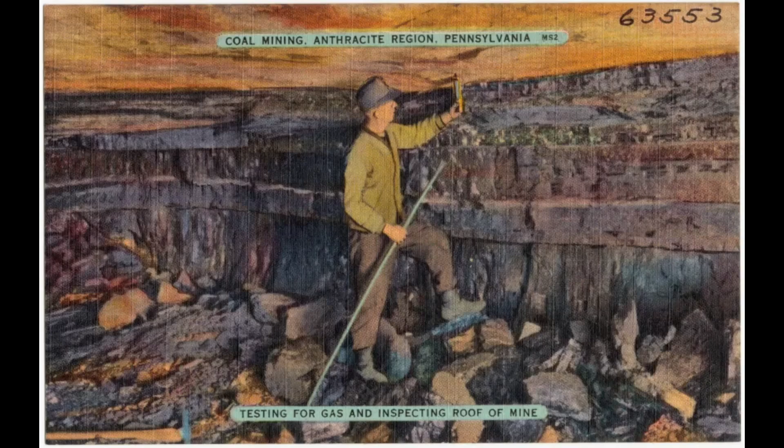It is no secret that the decline of the coal region left many skilled tradesmen without a job. In addition, a lot of workers in the industries that supported the coal industry were wondering what they would do now that coal was declining.

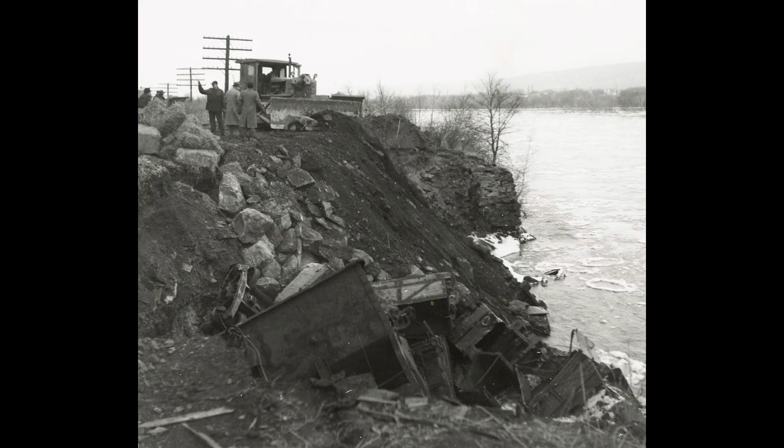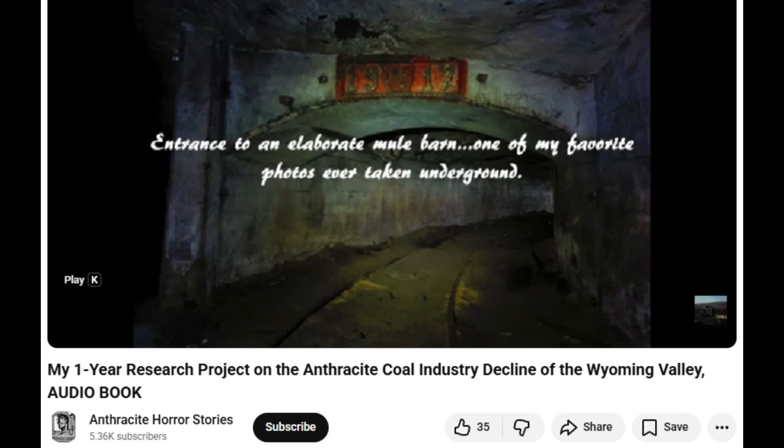The Knox disaster really put one of the last major nails in the coffin for the coal industry in northeast Pennsylvania. Jude O'Donnell over at Anthracite Horror Stories did a great essay on the decline in the 50s and 60s, which is worth checking out, and it interestingly corresponds with some of the trends I've seen in the drilling industry that supported coal.

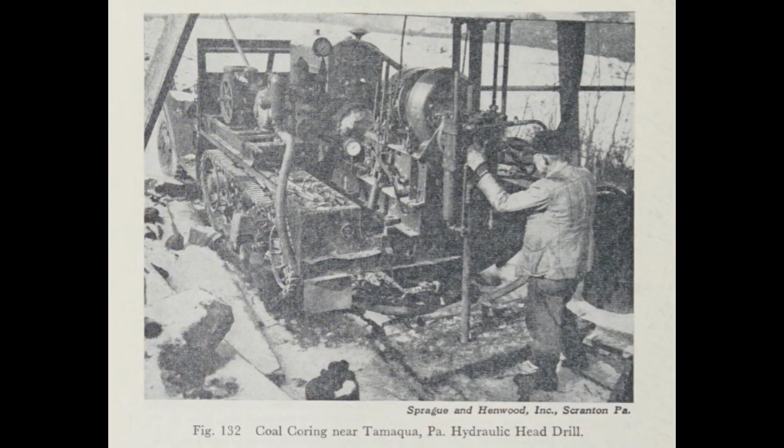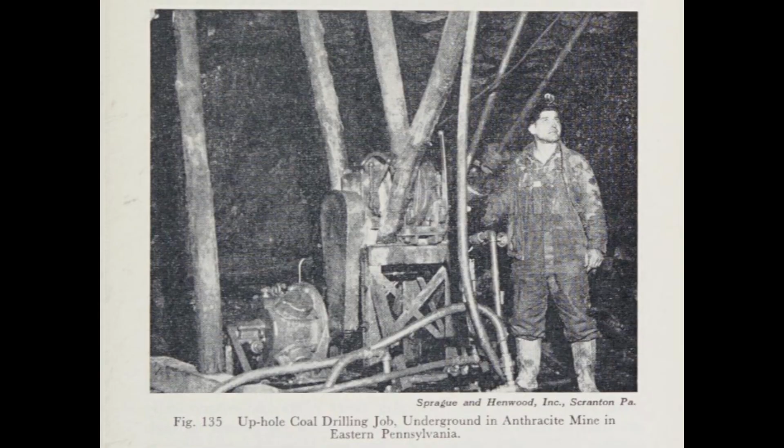Drilling was used for exploration, and in previous videos I touched a little on the geotechnical side of things. Many drilling contractors and firms in eastern Pennsylvania, when coal started to decline, transitioned more into the geotechnical field, particularly for foundation samples.

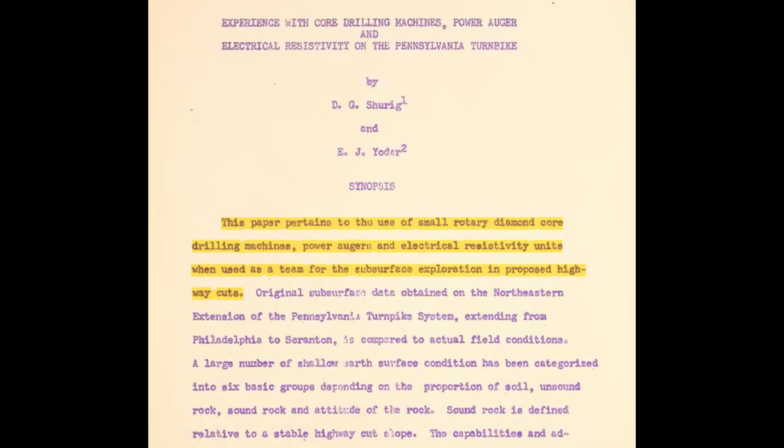I came across this technical paper online covering the geotechnical investigation for the northeast extension of the Pennsylvania Turnpike. If you're local to eastern Pennsylvania, no doubt you've driven along this at some point. This paper covers primarily the use of core drills, auger drilling, and electrical resistivity testing, and how reliable and accurate the information recovered from those three methods was.

The information was gathered over about a year between 1954 and 1955, placing it in the time period of major highway construction in the United States and the decline of the coal industry, since it was only a couple of years later that the Knox mine disaster happened.

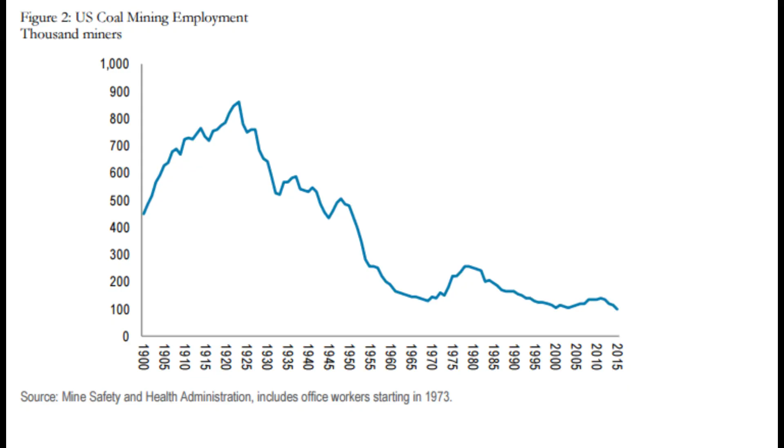As we could see from the graph before showing the employment of coal mine workers in the United States, there had been a steady decline since the 1920s.

It had been known since the 1920s that you could use a small diamond drill to take samples of soil and use that information to estimate the bearing capacity of the soil.

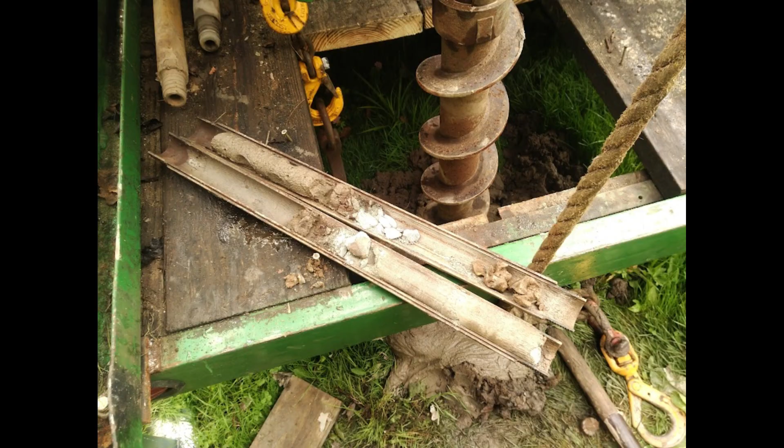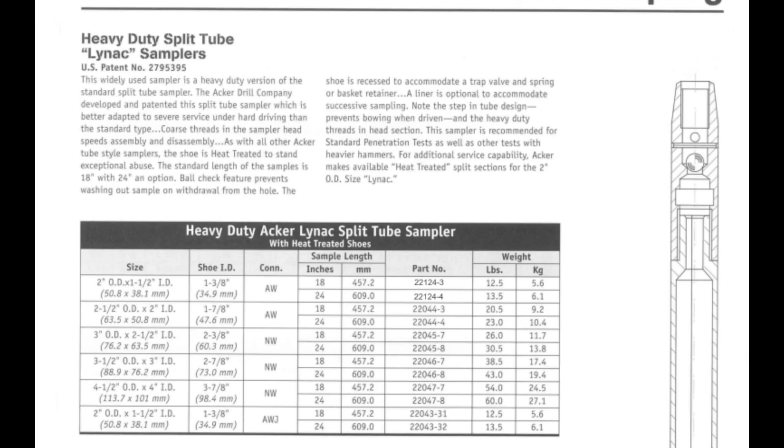For the last century, the split spoon sampler has been the backbone of soil investigations. It was originally invented by Sprague and Henwood out of Scranton, and later Acker Drill made design changes to further improve it.

The report specifies that 2-inch split spoons were used for soil sampling, while single tube core barrels were used for rock coring.

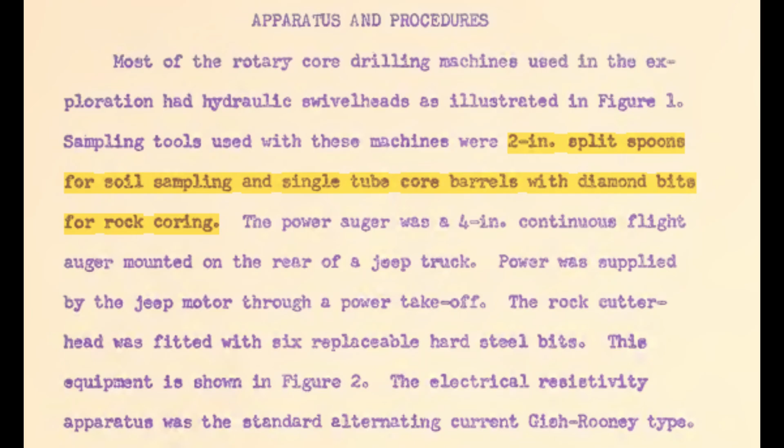In my core barrel videos, I cover single tube core barrels, but with a split spoon sampler they call it a standard penetration test. You have a 140-pound weight dropped 30 inches onto your 2-inch sampler, and you count how many blows for every half a foot of penetration. That correlates roughly to the density and bearing capacity of the soil.

If the other methods indicated rock potentially above grade during the design phase, core drills would be brought in to core that rock. To get down to rock, they'd have to drive a 4-inch casing with a 300-pound hammer, and this used to actually be a standard.

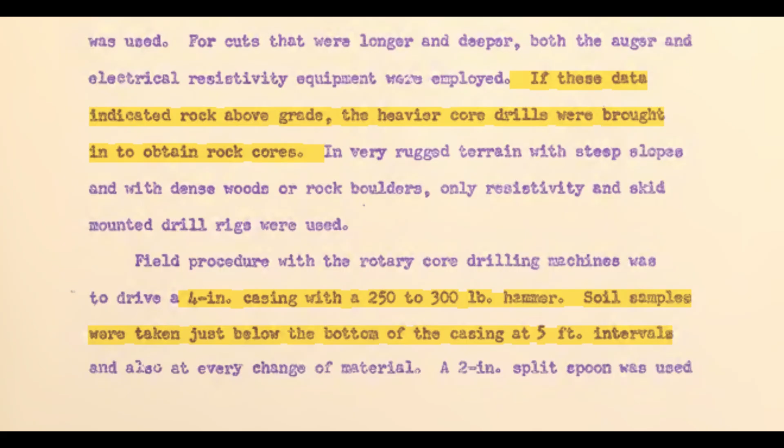It would be 4-inch outside diameter casing, 300-pound hammer, 24-inch drop, and you'd count how many blows for each foot of penetration. Very similar to the split spoon sampling method, but now the casing blow count is an outdated practice.

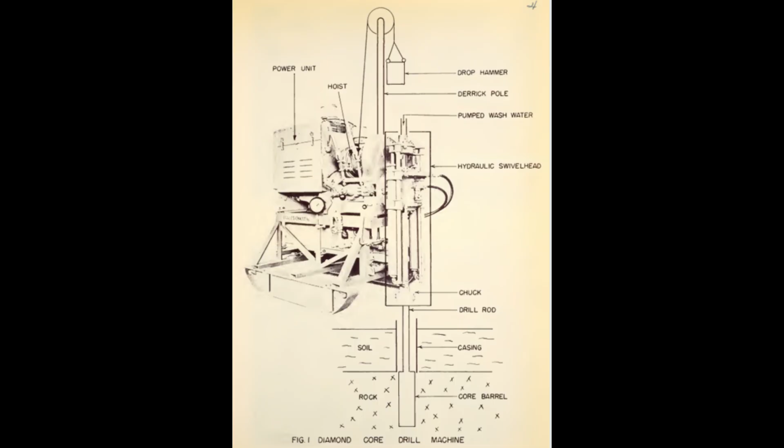The previous page also indicates that split spoons were taken every 5 feet or at the change of material, which is still a fairly similar practice to modern day.

Here there is a schematic they provided, or diagram, of the diamond core drill used in this method. You can see a sketch of the drop hammer for casing or spoons, and the core barrel in the ground inside the casing.

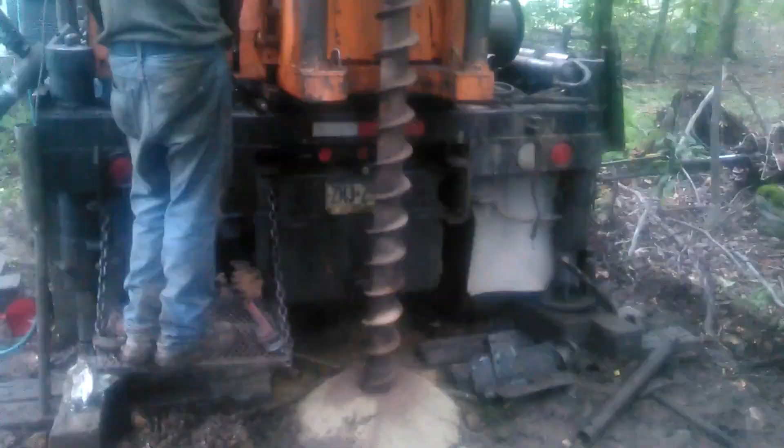The problem with augers is you can't take a sample of your rock unless you grind it up. With that limitation, you would still need the ability to core that rock, and this was realized by the project managers at the time.

With a core drill driving casing, when your casing stops driving, you just start coring. With an auger drill, you're going to have this violent shaking of your flights in your augers when you hit rock, because you're trying to grind against it.

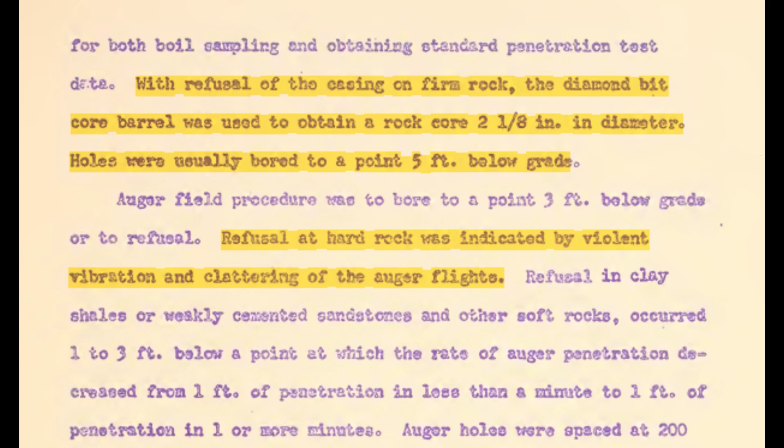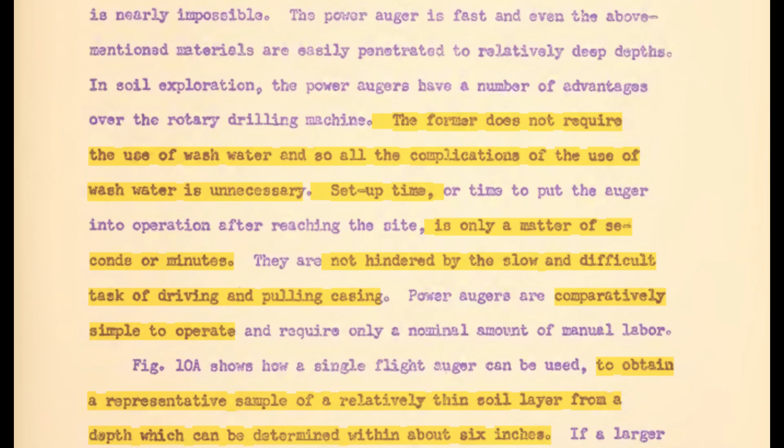However, the augers did have one advantage: they could move a lot faster than you could with a core drill. And to that extent, they could recover more information faster, but not as detailed. The information from the standard penetration test and rock coring was more valuable for locating the top of bedrock. So what if you could take the advantages of both methods and combine them?

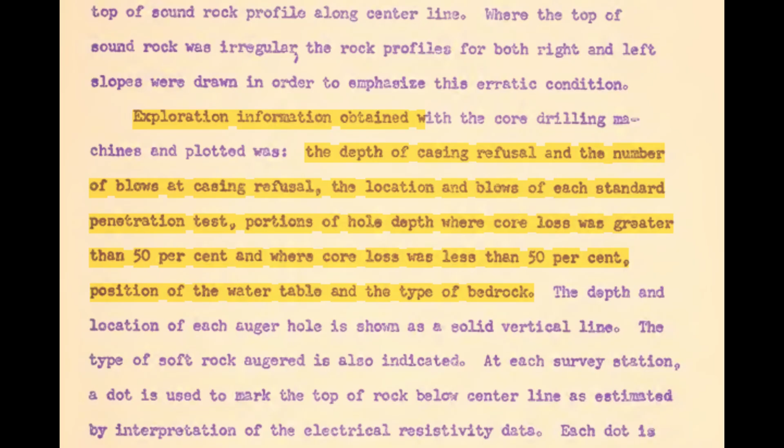In 1958, when this report was written, it was recommended that we should have special sampling augers developed specifically for soil sampling and equip them with drop hammers for taking your split spoon standard penetration test. That would eliminate the need for water for cleaning out driving casing, and you'd be able to drill a lot faster and with a lot more mobility than the core drills at the time.

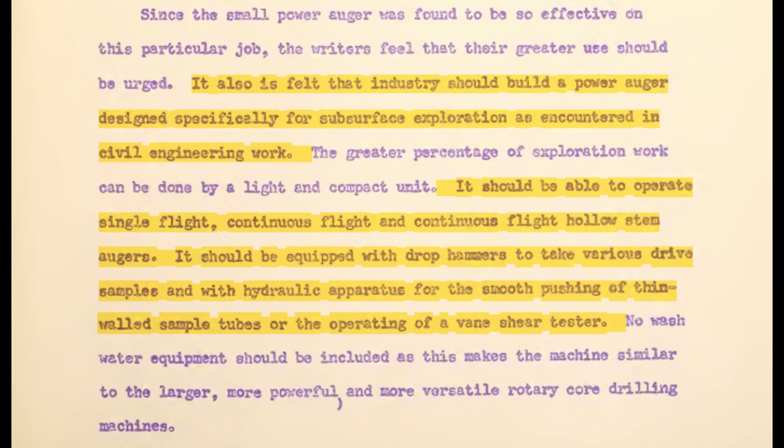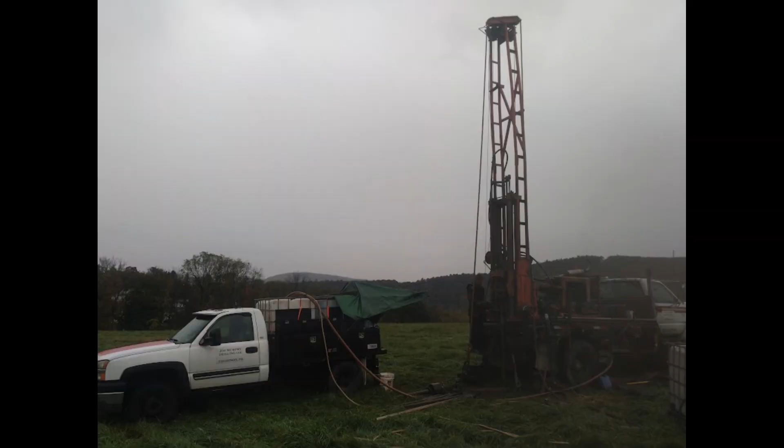It's my hypothesis that the drilling firms of eastern Pennsylvania paid attention to this and took note of it, because in the early 60s is when we start seeing the development of the long stroke core drills that could also auger. These machines typically worked like this: the older machines were designed for coring, and primarily coring.

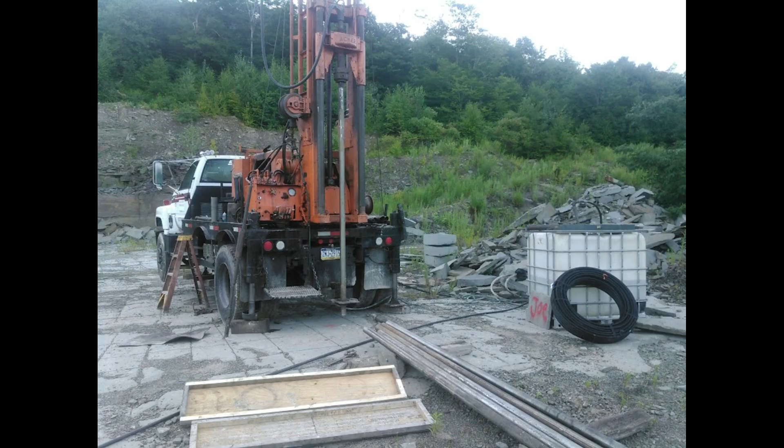If you want a machine that could cut rock fast, that's what you want. These newer machines were supposed to be more general purpose. You had enough RPM on spindle where you could core rock, maybe not at the most optimal speed, but you could. You had torque, so you could run augers, and you were equipped with a cat head, so you could drive casing if you wanted, and be able to drive samplers.

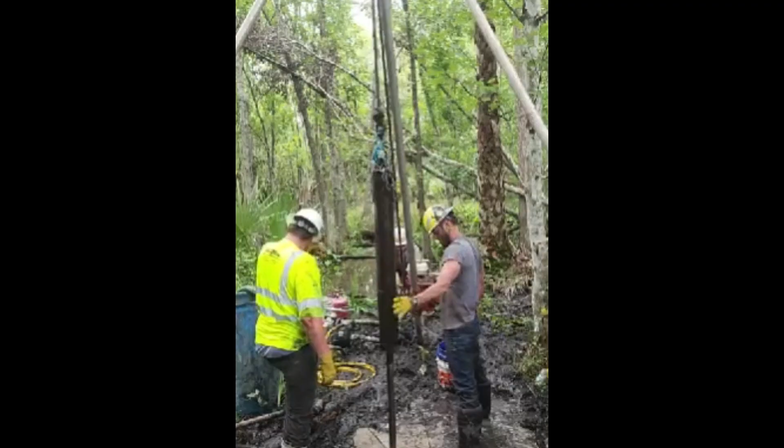The feed mechanism from the hydraulic drill head would work with push-type samplers like Shelby tubes. This represents a larger shift in the drilling industry away from diamond core drill exploration machines into the geotechnical market. Because you have the decline of coal mining, but then you have all these civil engineering projects coming up in the design phase, especially highway projects.

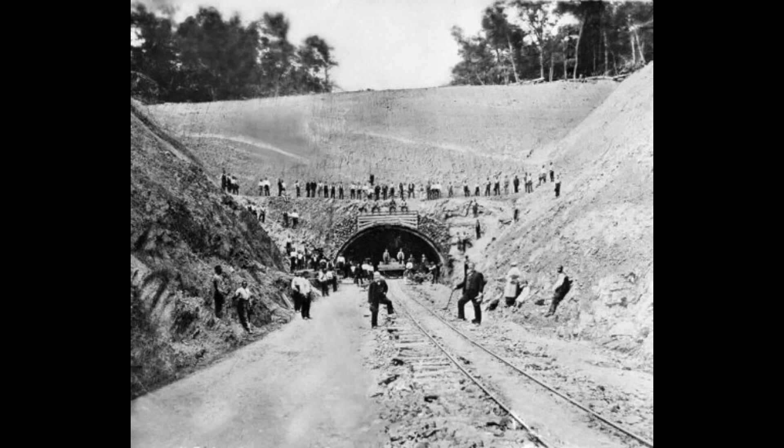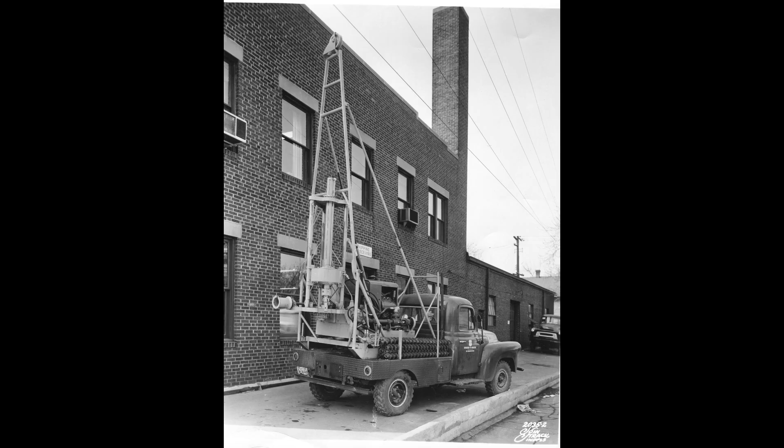So you've got other companies out west, like Mobile Drill, CME, Diedrich Drill, coming up with geotechnical rigs. Meanwhile, in eastern Pennsylvania, Acker Drill and Sprague and Henwood are trying to transition from making mineral exploration drills into making geotechnical rigs. So how did they do?

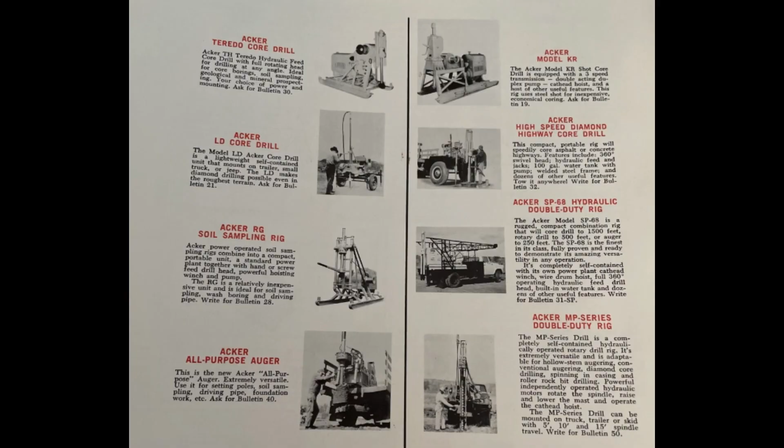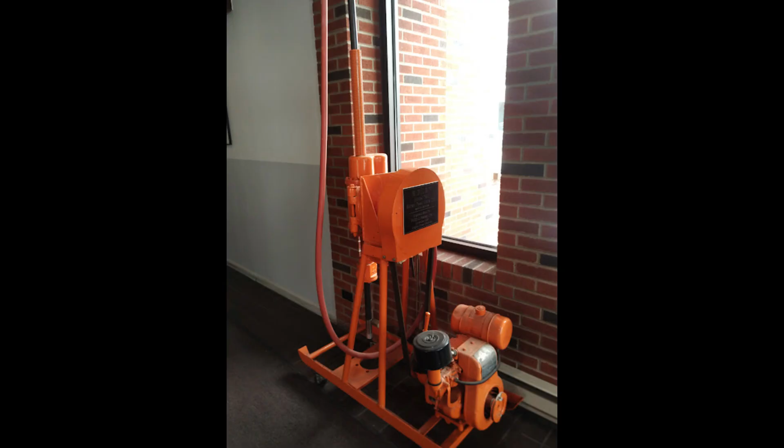Well, Acker Drill is still in business. They will still actually make the old series of diamond drills, the spindle-driven series, like the Ace and the Hillbilly, and they're still in business. They're doing pretty good, and in their outer office they actually have one of their original screw feed machines.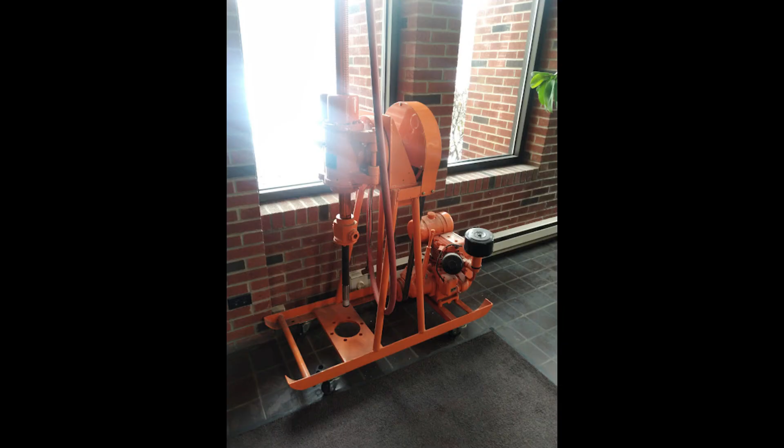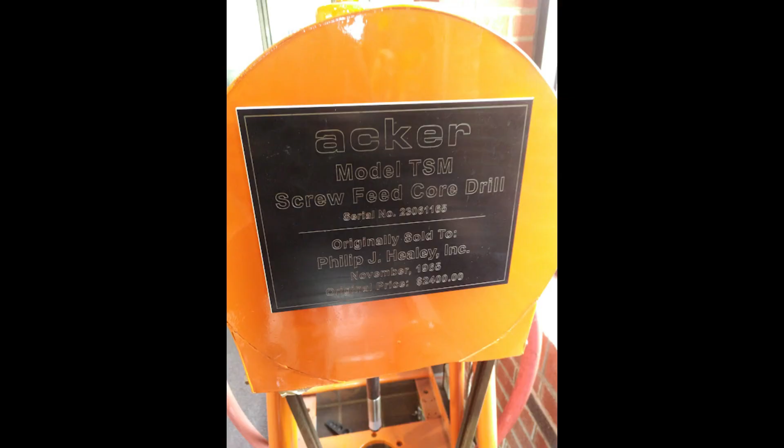They discontinued the contract drilling side of it around 1950, but they were still going strong into manufacturing. From what I'm told, the manufacturing and sales was a lot less headache for management than the contract drilling, especially with the decline in the coal industry.

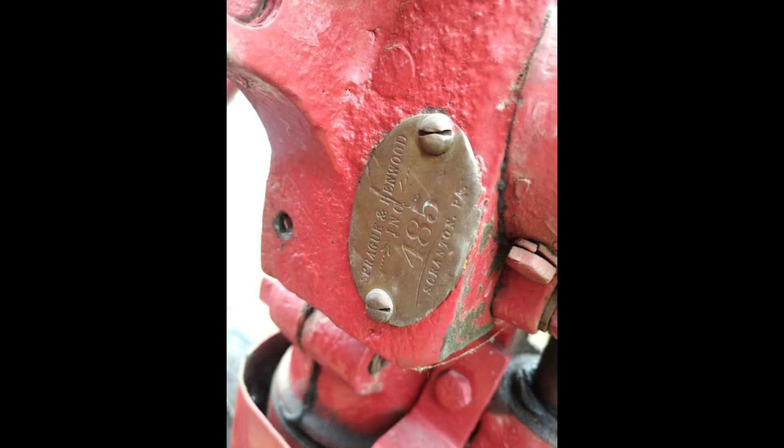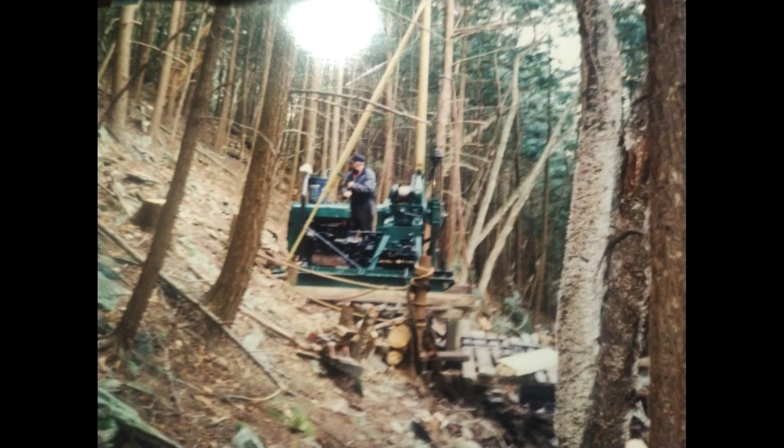So what became of Sprague and Henwood? Well, they held on to the old methods, driving casing and drilling it in, and it wasn't until the 80s, some 20 odd years later, that they started introducing auger drills. Even then, those rigs were produced in small numbers. There are still some operational, and as far as I could tell, only 3 or 4 machines were made that would have been capable of running augers.

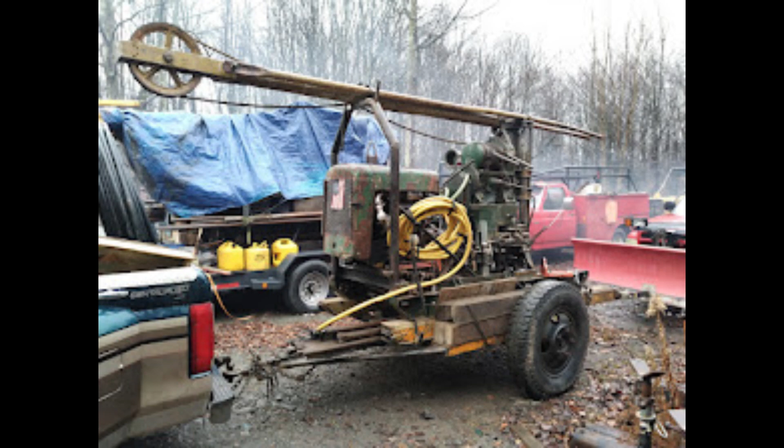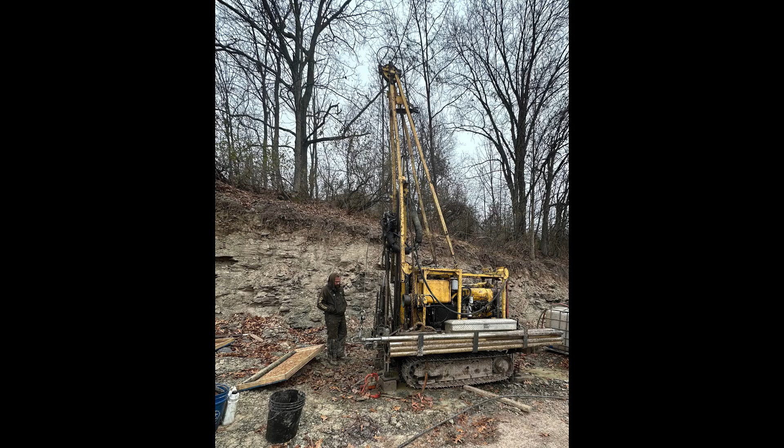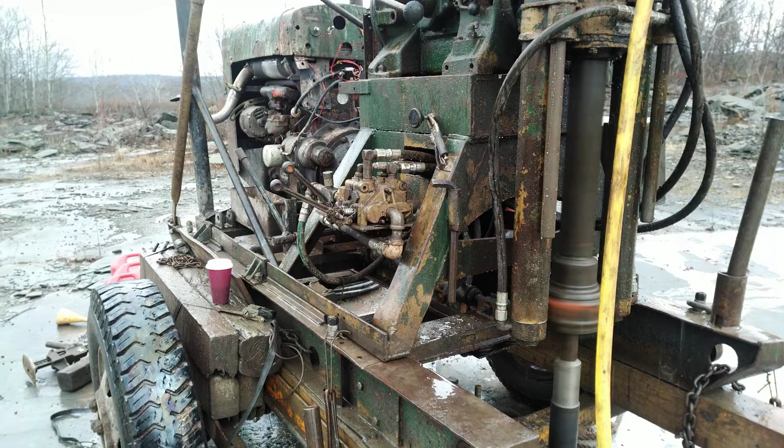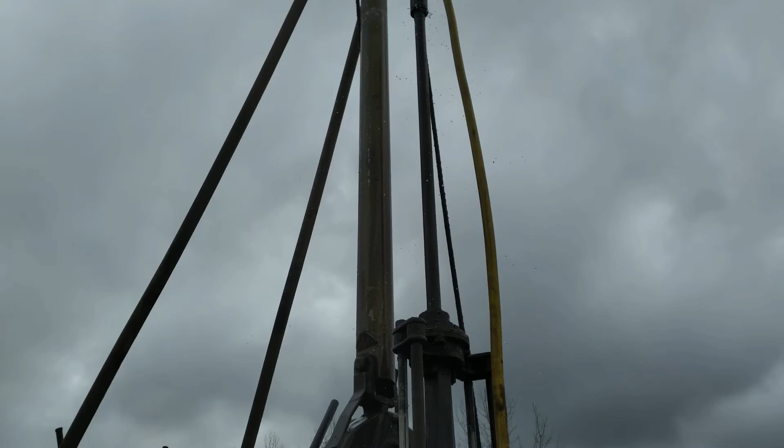And 2 of them I have, and one of them is actually up north being used for shallow water wells. In both of these cases, we see the Pennsylvania drilling industry attempting to continue after the decline of coal. With some measure of success, Sprague and Henwood survived for 30 years after, and Acker Drill survives to this day. So I would say it is fairly successful in adapting to a change from having all these mineral exploration contracts right in the area to having to focus on civil engineering.